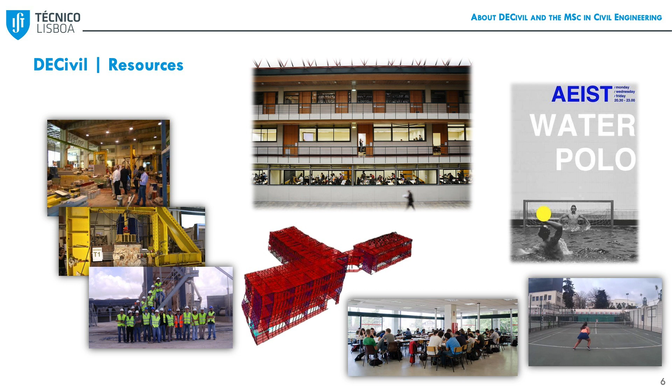I'm sure that most of you are aware of the resources that IST offers and also our department to our students, not only for teaching activities, but for other areas that are important in their lives: sports, students' associations. I think this completes their experience at IST.

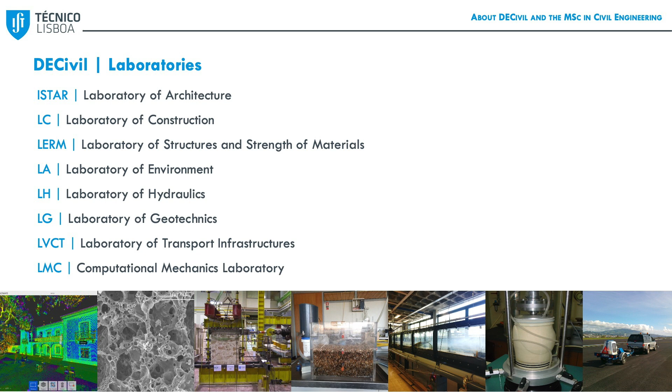For research infrastructure, I think we are quite well equipped in terms of laboratories. Here I listed, and you see some images of laboratories in different areas of civil engineering. This is very important for teaching activities, experimental classes, but also for research. So I would say that most students, or many students at least, develop their master dissertations in these labs.

I will let you read the names of the courses, while I highlight that the first semester is common to all areas of expertise. So you see the courses from the different areas of civil engineering that I will mention next.

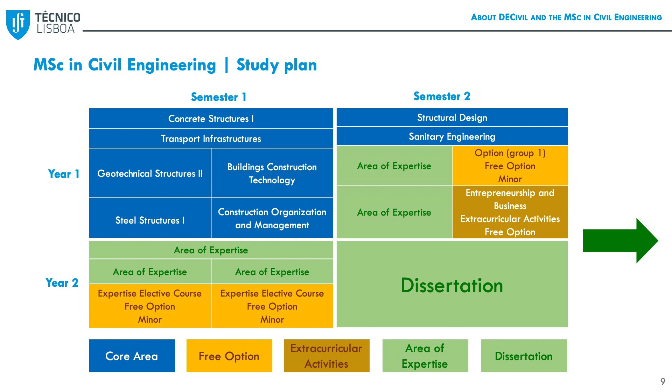Second and third semester, students already have to select their area of expertise, shown in these green boxes. They also still have some common courses from the core that we think is important for the background of any civil engineer. In orange, you can see some free options that students can select, either from civil engineering or from other departments, including a minor. And then finally, the dissertation that covers the last semester.

I think this is also reflected in the elective courses that students have, namely in these free options. This is different from the masters in civil engineering offered in other universities in the country, which are more narrow than what we offer.

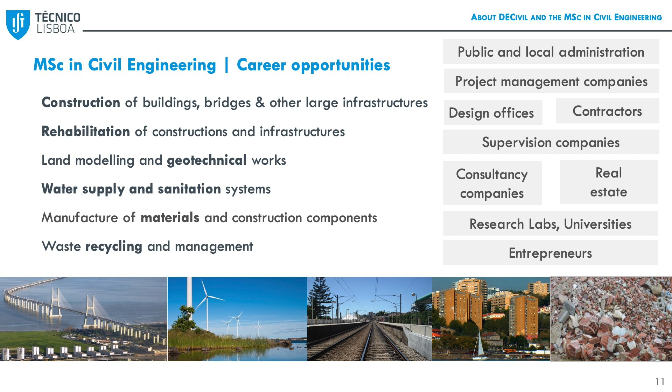Well, in terms of career opportunities, I listed on your left-hand side the areas of intervention typical of a civil engineer, and on your right-hand side, the stakeholders or agents where these activities can be developed. So you can see that civil engineers can operate in very different areas: construction, rehabilitation, geotechnical works, water supply and sanitation systems, materials and components, recycling and management of waste, urban planning, transports, logistics, management and maintenance of projects, works and assets, and also research.

And they can do it in these different roles: public and local administration, project management companies, design offices, contractors, supervision companies, consultancy, real estate, labs, and also building their own company. We have several examples of success of students from our master who started quite successful businesses in civil engineering and related areas.

Well, in terms of career opportunities, you are aware of the recent past. My personal view is that the future prospects should be optimistic. We know that there is a big shortage of civil engineers worldwide, not only in Portugal, but also in Europe, in the US. Wages are starting to increase, fortunately. And there are many big projects, public, private, long-term investments scheduled for the next two decades. So I think there are lots of things to do for civil engineers.

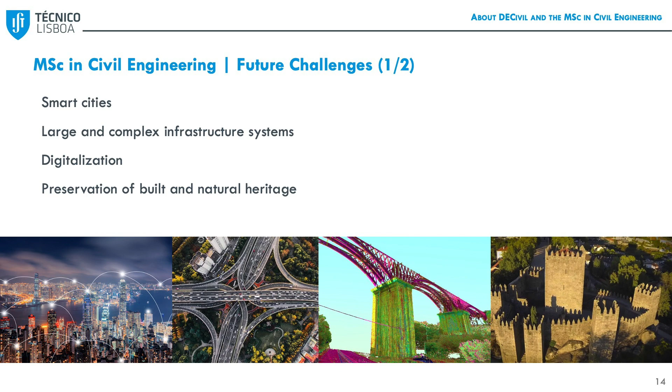Another aspect worth highlighting is that we civil engineers are essential to address many of the future challenges of mankind. If you think about some of these challenges, civil engineers are needed there. We are needed for smart cities. We are needed to develop these complex and large-scale infrastructure systems. The industry is in a transition towards digitalization, robotization.

At the same time, we need to preserve both our built and natural heritage. Civil engineers will also be extremely important to respond to societal changes, but also to address a number of problems, natural risks, and climate change that is there. This will impact not only our daily life, but we need to prepare our infrastructure and buildings for all these changes. So here I illustrated some of the problems that we will have to help solving.

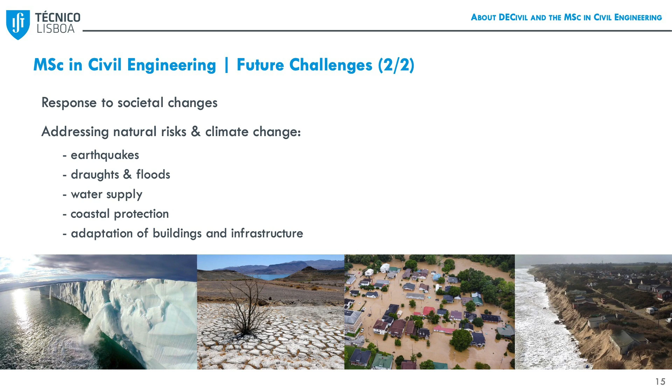Droughts, floods, water supply, coastal protection. We have a big coast. We know that this will happen. And civil engineers will be needed to address these problems.

Okay, so let me move now to the second part. In 20 minutes, and I will try to fill the time that was allocated, it's not easy to explain research on composites, because most of you perhaps are not aware of what composites are. So I will try first to explain what these materials are, how they were introduced in different industries during the years, how they can be applied in civil engineering, what are the main challenges for such application, and how we at Técnico have been addressing the unknowns and those challenges in innovative products.

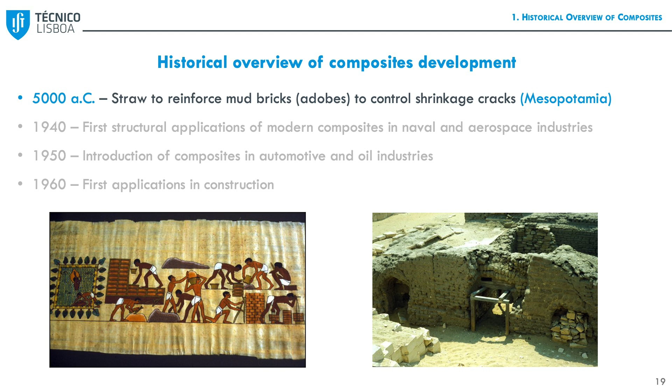The first known composite material in history are these adobes, used or developed in Mesopotamia almost 7,000 years ago. The idea was brilliant. These adobes were used for construction of houses, sanitary, different applications, and they were basically mud that was put to dry under the sun. During the drying process, these bricks cracked due to shrinkage. The main idea was to introduce fiber reinforcement that resists tensile stresses and prevents these cracks. This is basically the same that we are doing now with modern composites.

We use fiber reinforcement, not natural but synthetic, to reinforce another material that is not mud but a resin.

Okay, so modern composites, well, it took a while. We had first to wait for the plastics industry to develop in the 1930s and 40s. Then we could use these modern composites in first naval and aerospace industries, which are still large consumers of these materials, for instance due to their lightness, which is very useful for these specific industries.

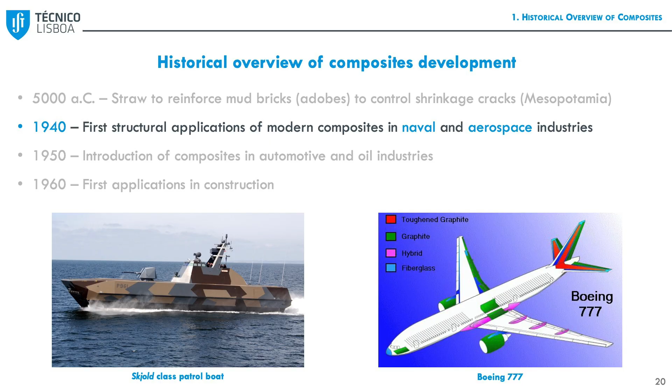In the 50s, they were introduced in automotive and oil industries, where they are still used very often. And in construction, quite interestingly, there was a first attempt in the 60s to use composite materials.

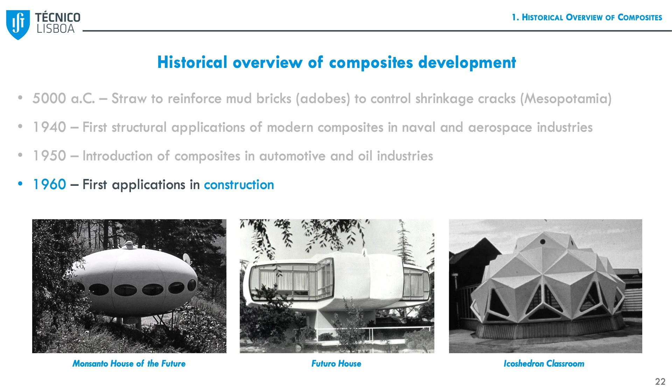Here I brought three of some of these first stage applications. You can see the rather futuristic architecture. Architects were in fact extremely curious and motivated by the potential of these materials, by the shapes they could cope with. But this initial effort ended up being abandoned for two reasons.

First, the cost. The material was very expensive by then. And second, people or engineers were not aware of how to design these materials. There was not enough technical knowledge.

Well, in the 70s, there was an extension of these products to new markets. So racket tennis, okay, the graphite tennis rackets are from this period, skis, and also surfboards.

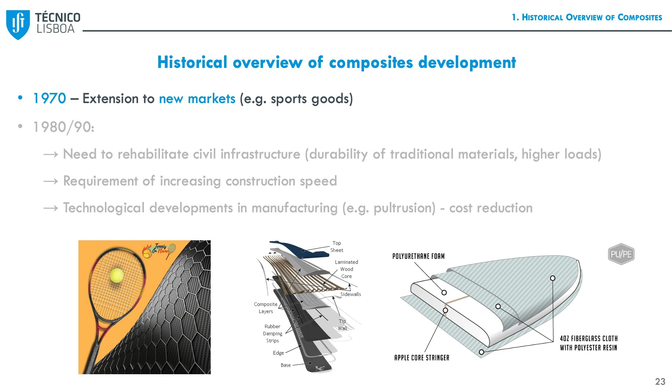If you look at this surfboard, it's basically a sandwich panel like this one. Two face sheets of composite, and in the middle a polymeric foam. It's the same.

So we get to the 80s and 90s when these materials again saw a resurgence of interest by civil engineering. And here I list the three main reasons.

The first one: there was a huge need to rehabilitate civil infrastructure. Most structures, or a large stock of buildings and bridges, had been built after World War II, and corrosion problems, namely, started to appear with big relevance in this period. So it was clear that new materials, more durable and less prone to corrosion, were needed.

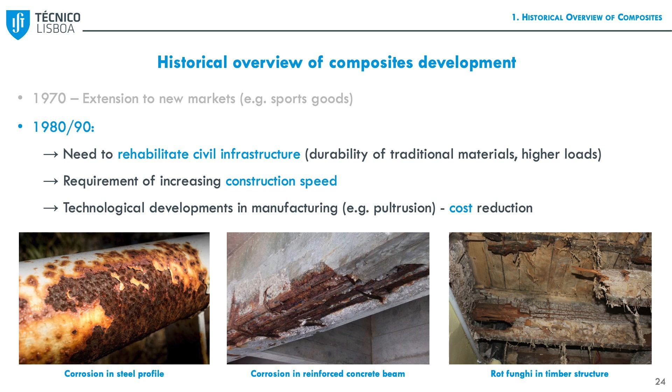Second reason: the interest for having faster construction. This occurred together with a reduction in manufacturing costs due to technological developments in processing. So these three features that composites offer - high strength, lightness, and durability - together with more affordable costs, explain this new interest from the construction industry that has lasted since the 80s and 90s.

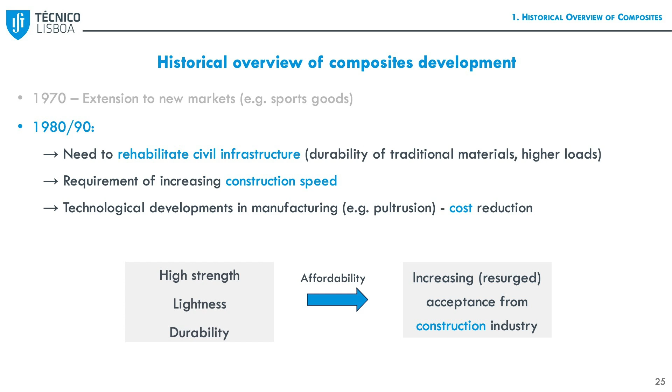So let me now show what are the key products that are available for civil engineering. I organized them here in 4 groups, and I will show you examples.

So the first application is the internal reinforcement of concrete structures. So bars - instead of using steel bars, we can use FRP bars. FRP stands for fiber reinforced polymer.

Second example is the external strengthening of existing structures. This is now a well-established technique - most design offices and many contractors use it regularly. Strips, such as this one, made of carbon fiber with epoxy, or sheets like this one that is dry and then needs to be bonded to the substrate, are being used not only with concrete structures but also with other structural materials.

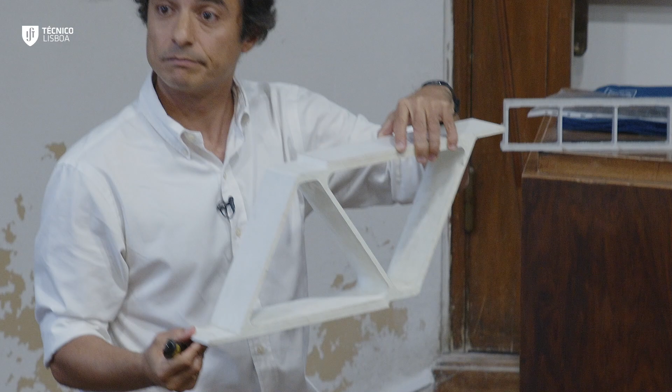And here, two different solutions where we rely more on composites: what we call hybrid structures, where components made of composite - for instance, this structure here has one of these decks made of composite - but it is connected to steel girders. So they work together, which is why we name these structures hybrid.

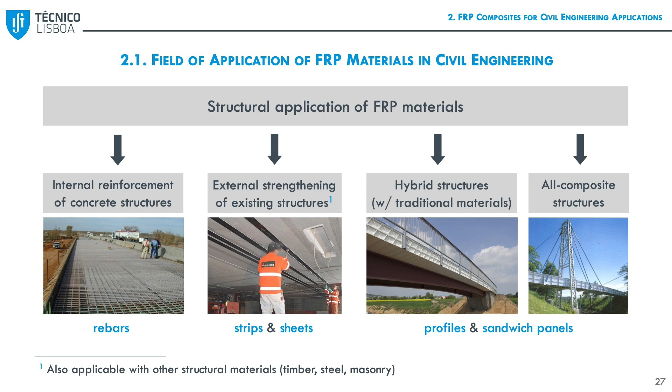And then we have all-composite structures, where all components are composite. For these two cases, we have panels like these ones, and profiles.

So let me now introduce some features for each of these products. I will not give technical details, just a glimpse of what's available.

So for rebars - and I'll try not to be too technical - they are basically made of glass fiber rovings, meaning axial fibers only, with a matrix of vinyl ester. You have different resins; vinyl ester is an improved resin compared to polyester, which is the standard grade, because concrete is a relatively aggressive environment, so we need a slightly improved resin.

Well, they are supplied in diameters similar to steel bars. The surface finishing initially was a problem - the adherence to concrete was not good - but now, as you can see, either with ribs or with sand coating, the adherence to concrete is enough. And these are the geometries available: straight bars, and also bars with bends to produce stirrups or ties.

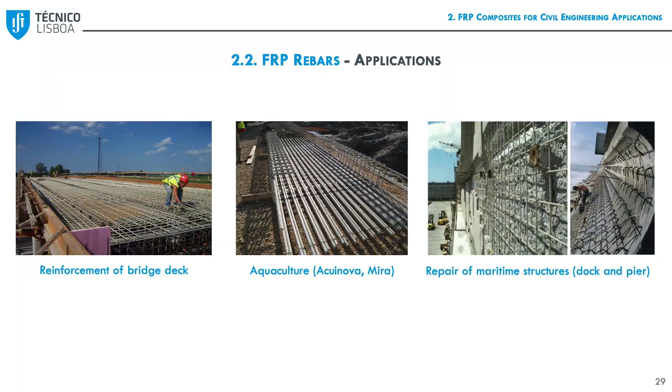Here are some examples of applications: bridge decks. This is useful in cold regions where de-icing salts, which are highly corrosive, can be used in the winter. And here, maritime structures - this one in Portugal, actually - where due to the salt water, it's a big advantage to use these rebars.

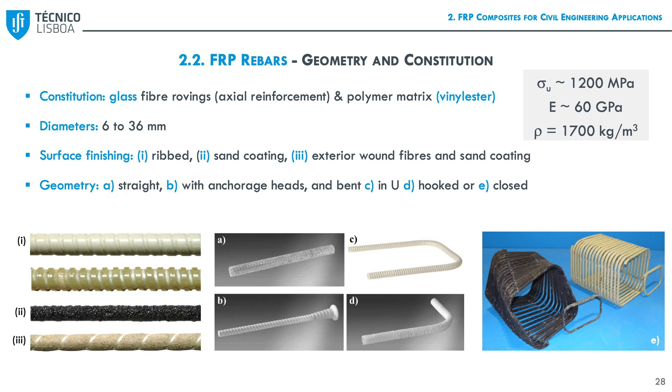Now, the properties that I did not mention. Tensile strength, 1,200 MPa. This depends on the amount and type of fibers, but this is a typical value—about 3 times what we have for steel, with a self-weight that is 4 to 5 times less. There is always a disadvantage, otherwise we would always use this type of bar instead of steel, and one is the elastic modulus. They are more deformable if they are made of glass fibers.

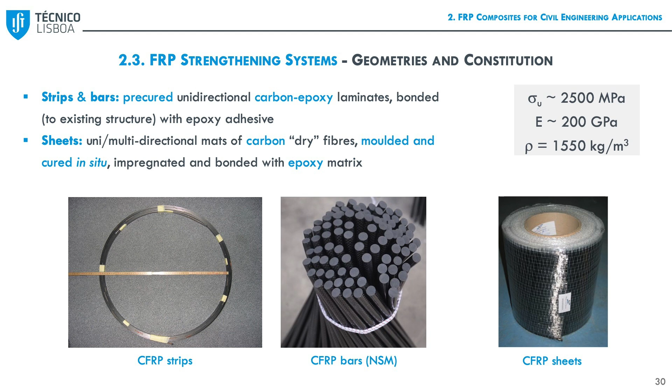The second product are strengthening strips and sheets. Strips like this one are made of carbon fibers. They resist more than glass, and they are extremely lightweight, as you see. The tensile strength in this case is around 2,500 MPa, so 5 times more than steel, with an elastic modulus similar to steel.

So this is why it's now a standard solution for strengthening. These strips, and also bars, are very easily applied by bonding adhesive and sticking the element to the substrate we want to increase the capacity of. The other product are these sheets—dry sheets with fibers that can be applied in different directions depending on your needs. They are simply molded and cured on site with epoxy matrix. The advantage is that if I want to reinforce or strengthen this member, I can apply it like this, molding it to complex shapes.

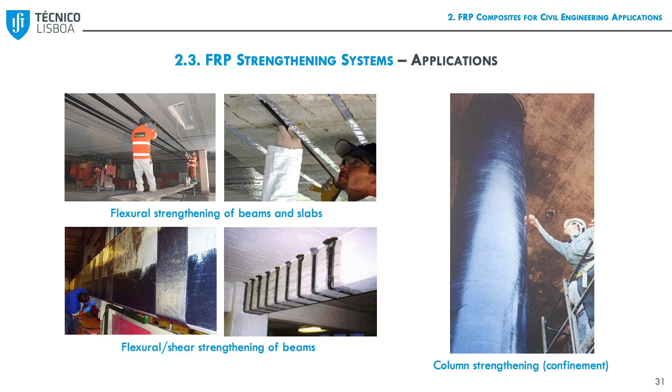Here you can see some applications in flexural strengthening of beams and slabs, and here another application of sheets for the confinement of columns. This is very important to improve seismic resistance, to confine vertical members, and it's very effective.

The third product that I mentioned are profiles. Here what we call the first generation profiles, thin-walled sections. They look pretty similar to steel profiles, but they are much lighter, 4 times lighter, with similar strength but lower stiffness. So this changes the way they are designed.

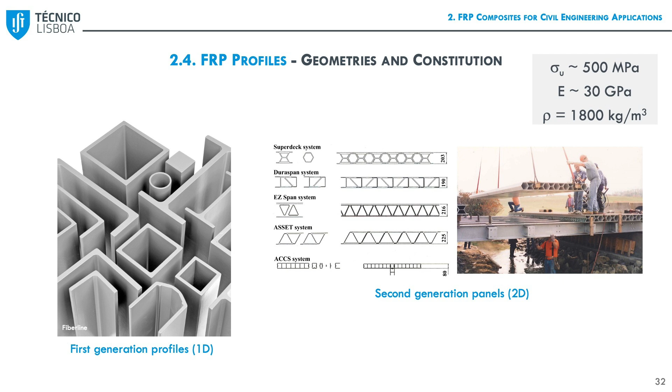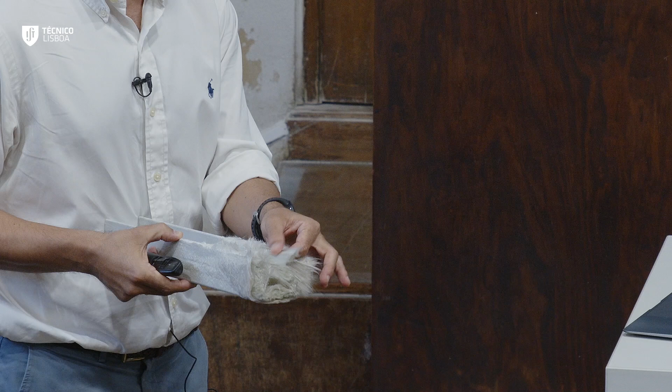On your right-hand side, you can see what we call second generation panels or profiles with 2D sections, used for decks, for instance, of bridges. This image, and also this profile I brought, shows the internal constitution of these profiles—you can see rovings, longitudinal fibers, combined with mats with fibers in different directions. The principle in composites is that we can combine these ingredients, using fibers in the directions we need, to obtain the strength and stiffness that copes with the design requirements.

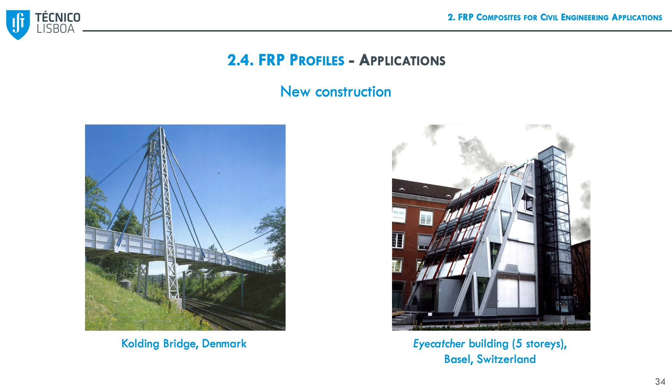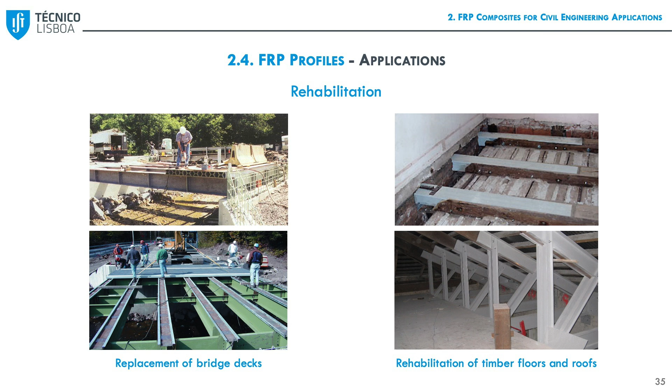Here you can see some applications of these profiles in new construction and also in rehabilitation: replacement of degraded bridge decks, where we can keep the girders, or rehabilitation of timber floors and roofs.

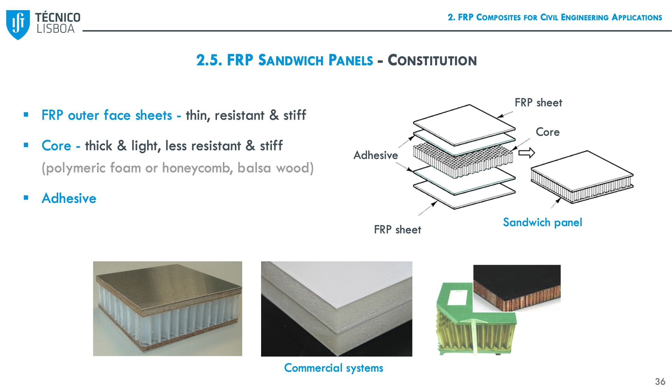The final of these products are sandwich panels. I already explained more or less the concept. In the simplest form, you have 2 face sheets of composite, which behave like the flanges of an I section, and in the middle a very lightweight material that provides the lever arm for the face sheets. So it's the type of solution that, compared to profiles, gives us the highest properties at the lowest weight. Here we can use balsa wood, extremely lightweight, and different polymeric foams.

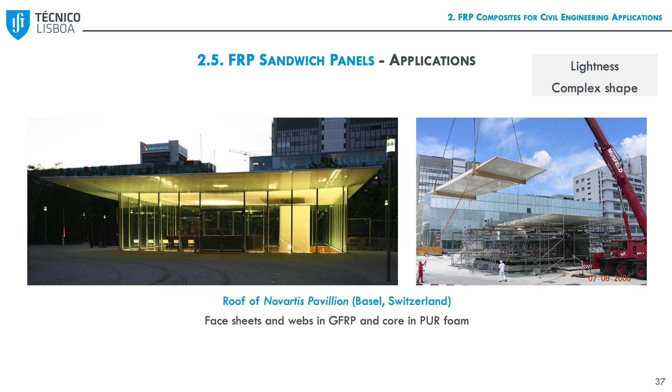So let me show you some examples of structures that have been built. This very nice roof was installed over this glass facade—it had to be very light and with a double curvature, so a complex shape.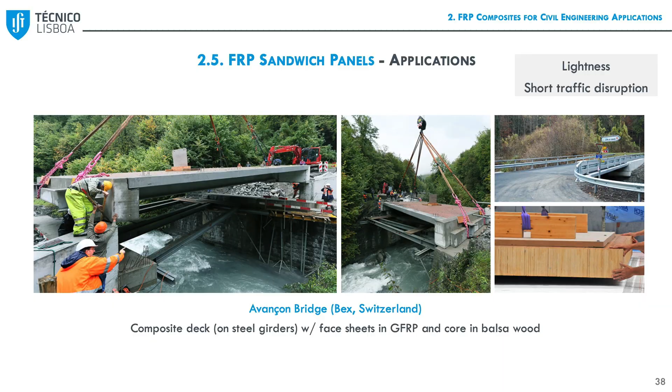This road bridge used exactly this type of solution, balsa wood, which had to be built very quickly to minimize traffic disruption. A very light solution was selected for this reason, and also because the abutments could not resist the loads of a conventional solution.

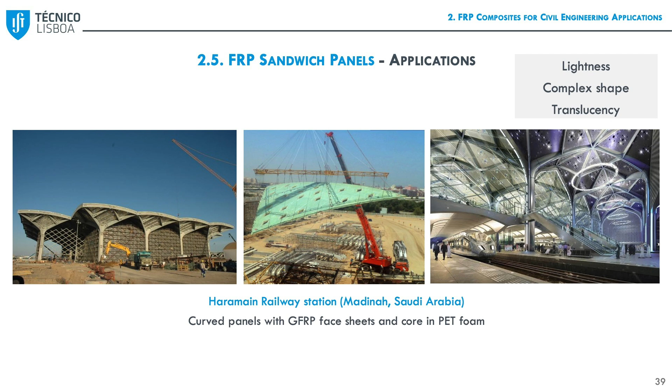Now that you know what composites are, let me very briefly detail the main challenges, in my view, that these materials face. These are quite complex issues—I would need more time, but I would like you to know what's at stake.

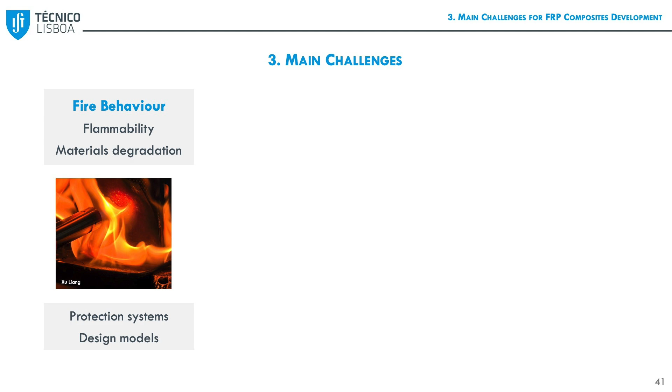I showed composites and I showed buildings, and in buildings we need fire safety. Fire behavior is a major concern here. These materials are flammable, so they burn, they release heat and smoke, and the material properties decrease at elevated temperature. This is one of the key points for any of these products if they are used in buildings—this needs to be addressed.

So we need protection systems, the same way we need for steel structures, but we need to know how to design them. While for steel there are already rules that have been validated and checked, this is where we still have a long way to go.

A second challenge is durability. This seems a bit paradoxical - I was saying that durability is a key advantage, and now it's a challenge. It is, in fact, a challenge, because these materials have proven good performance in quite harsh environments. But in all those industries that I mentioned, we don't need to design for 50 years or even 100 years.

This is a big difference to civil engineering. After looking at the codes used to design structures in those industries, I think our codes are better - reliability of our structures is guaranteed in a more comprehensive way. We know that some degradation occurs, but we still don't know how much it will be after 50 or 100 years.

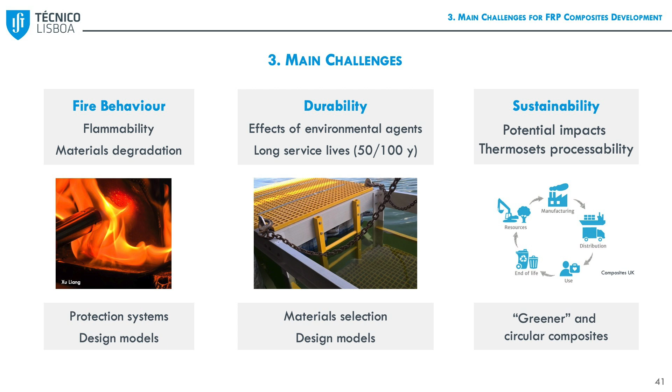So we still don't have reliable design models for durability design. Third big challenge is sustainability. Now, for all solutions that we adopt in engineering problems, we need to know what will be the impact compared to alternatives. And composites, for different reasons, cause environmental impacts.

One important reason has to do with the type of resins we use, which are thermosets. It's difficult, not to say impossible, to reprocess this type of resin in practice. So alternatives are being pursued that need to be assessed throughout the life cycle. The industry trend right now is really towards greener and circular composites - this means bio-based composites, composites with thermoplastic resins, so different routes are being pursued here.

Okay, so in these very last minutes, let me show some of the work that we have been doing in these areas. First of all, what has been the research team.

This group was started in 2008, so it's 15 years old already. Until now we were 3 professors - now João Firmo moved to concrete, but still working in composites. We have 4 postdoc researchers who have been working in this area for quite some years, 8 PhD students, some already ending, some starting, and every year we host around 6 master students.

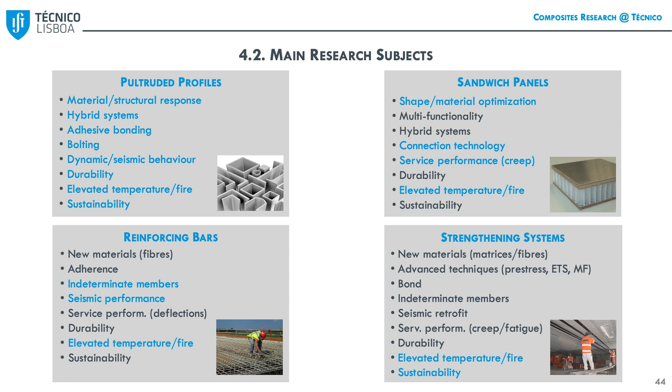Here I listed the research topics organized by those 4 products. I don't expect you to read them, but these are the topics that have been relevant at an international level. I marked in blue the topics in which we worked, or at least gave some contributions. One interesting thing is that those challenges I mentioned - durability, fire behavior, sustainability - are present in all those products, it's everywhere.

So I will just, because the time is short, show some highlights of what we did, especially here in profiles, but not only. Of course, this was the starting point.

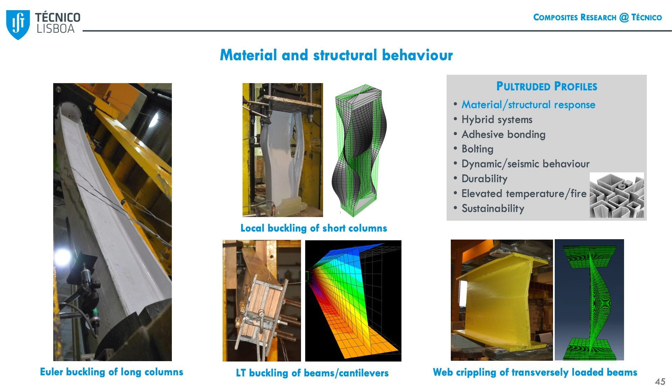We had to understand the mechanics of these materials - the material behavior, the structural behavior of different members, columns, beams. Some phenomena are similar to what we have in other structural materials: local buckling, Euler buckling, lateral torsional buckling, web crippling. But of course, materials are different, so the phenomena are triggered in a different way.

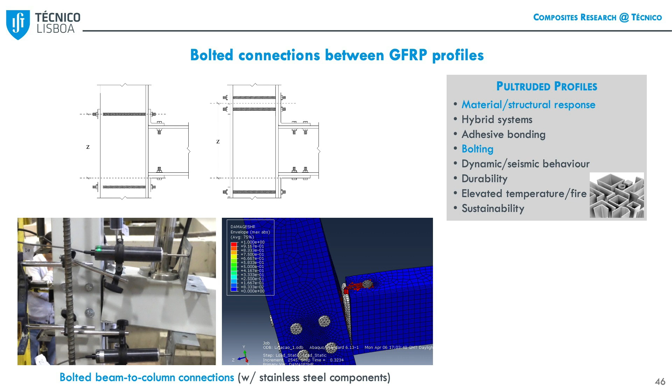We also worked on connections, bonded and bolted. This is also a bottleneck of these materials because they are orthotropic, so they don't behave the same in all directions. The route we pursued was basically to adopt hybrid connections - including stainless steel components that are able to dissipate energy, to have nonlinear deformations, combined with composite materials. This proved to be quite interesting, and we upscaled this to the structural level.

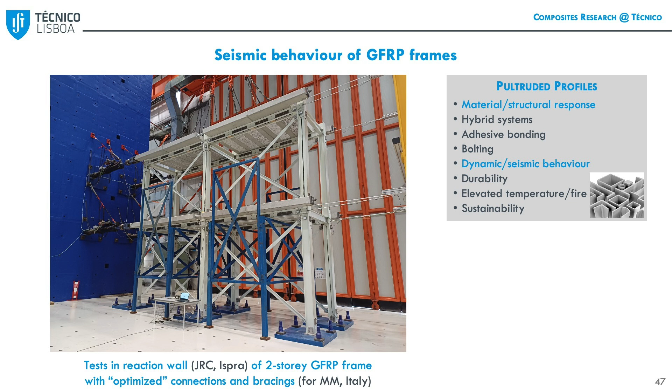These are very recent tests we did in ISPRA, at the Joint Research Center, for an Italian company, where we designed optimized connections for them with this concept. This frame was tested in a reaction wall, under horizontal loads, to assess its ability to resist wind loads, but also seismic loads.

In another project we assessed the same problem with this type of connections, and we did tests on our shaking table. The idea was to see if it resisted our 1755 earthquake - actually double that in terms of accelerations.

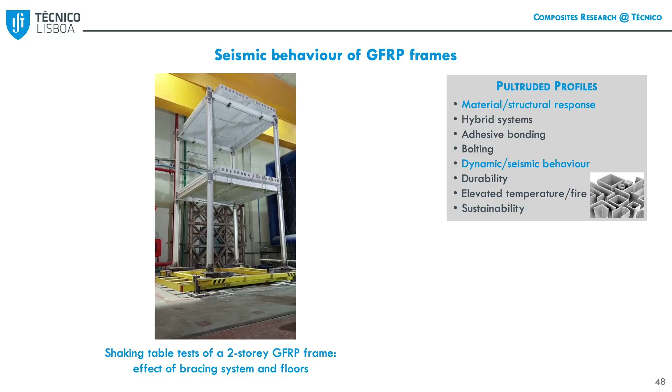So we were about 15 meters away, okay? And it resisted.

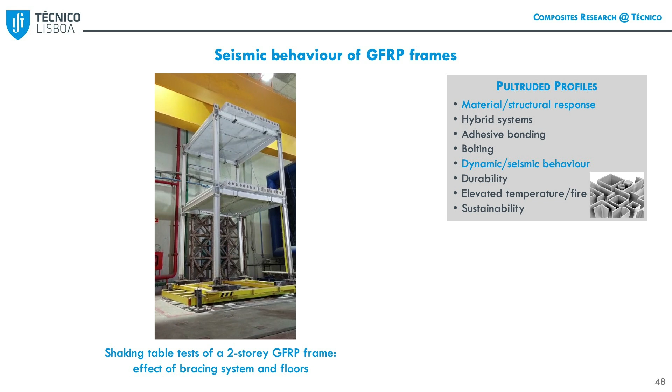Okay, moving down in terms of scale, durability. This for me is one of the key points we need to improve in terms of knowledge. So what we have been doing in recent years is to check or understand what happens due to different environmental agents. We are doing this for natural weathering. This is a project we are developing with different stations located in different areas in Portugal, where the aggressiveness of different environments is different. But we cannot wait 20 or 50 years.

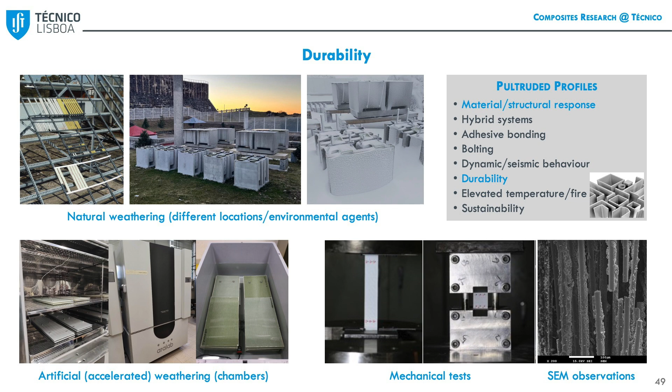So we are also doing artificial weathering in chambers, and here the idea is to cross-correlate the degradation in terms of performance between the two types of weathering. At the same time, we are looking into the oldest structures built in Portugal, that are 20 years old, and collecting material to understand degradation under real-scale aging.

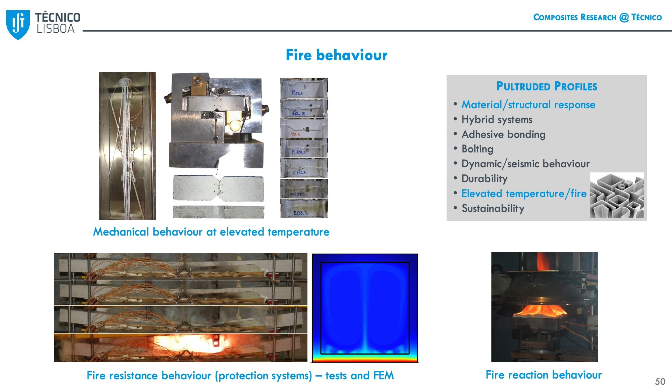For fire, we also did quite a lot of research to understand mechanical behavior at elevated temperature, and also at the member level, what happens when members are exposed to loads and fire at the same time. So both experiments, and here with colleagues from computational mechanics, the simulation, which is quite complex, of this problem.

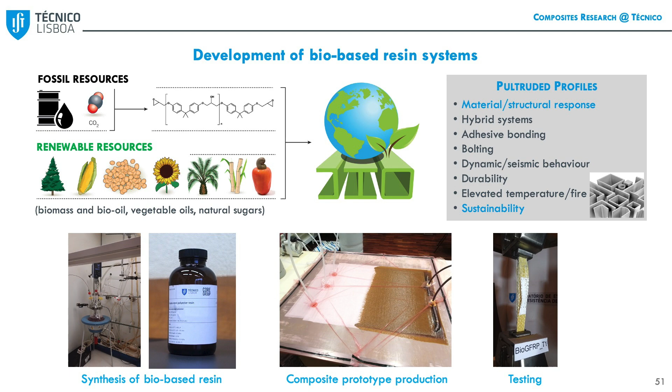And for sustainability, this was a project led by Mário Garrido, the bio-based resin systems. And here what's interesting to tell is that we did not have the expertise, so we asked collaboration of colleagues from the chemical engineering department. So big challenges involve teams with people from different areas.

So they helped us, and we had a brilliant student. He was a civil engineer, a structural civil engineer, and he had the courage to go to a chemical lab to synthesize bio-based resins. He was able to do it, and the idea here is to use renewable resources instead of oil to produce our resins. It was quite successful, as I will show in one of the last slides.

Well, to finalize, I'm about to finish. We have always tried to translate this knowledge to applied research projects, to respond to challenges and requests by companies.

One of these projects was the Clickhouse project. This was developed with Minho and also with ALTO, a company in Maia. The idea here was to develop an emergency house, all composite, that could be built in one day by 3 workers without any relevant equipment.

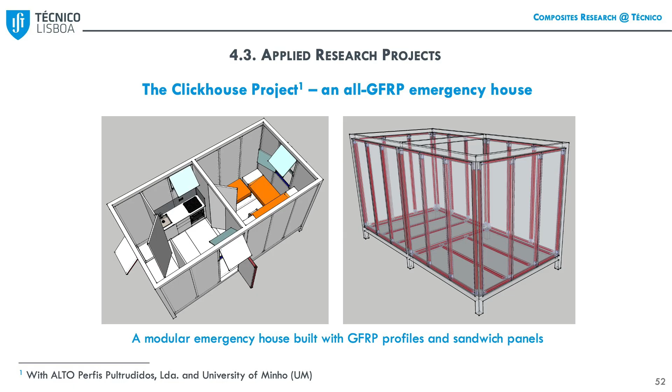So we had collaboration of colleagues from architecture for the design of the layout, and then all the facilities like water supply, acoustics, thermal comfort, all these aspects were addressed experimentally and then based on simulation. This is the final prototype that was developed.

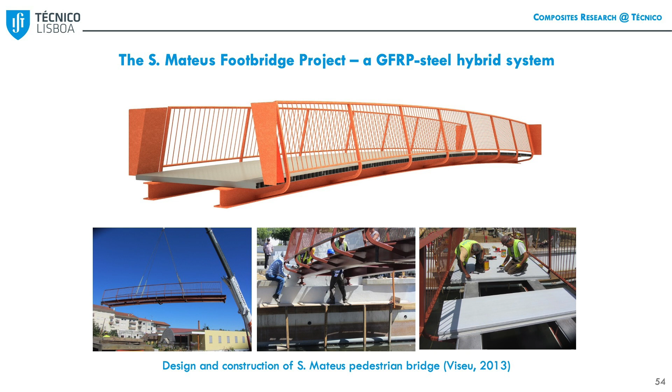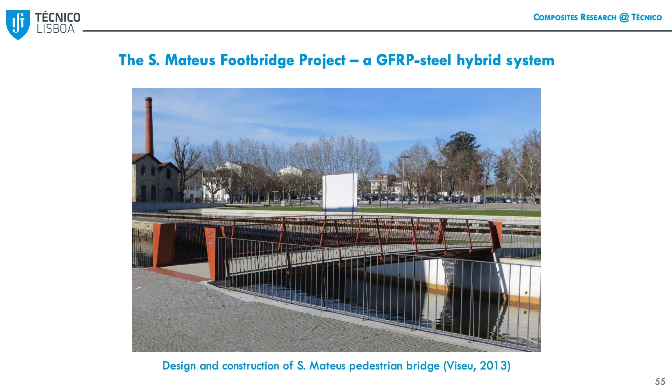Another project was this hybrid footbridge that was built in Viseu, where our student came from. It combines steel girders that you can see here. They were produced in a shop, lifted with lightweight equipment, positioned over the abutments, and then you can see these panels that were brought by 2 men very easily and simply bonded on site. So this was built in a few hours. This is the bridge after being completed, and here you can see how it is integrated in the landscape.

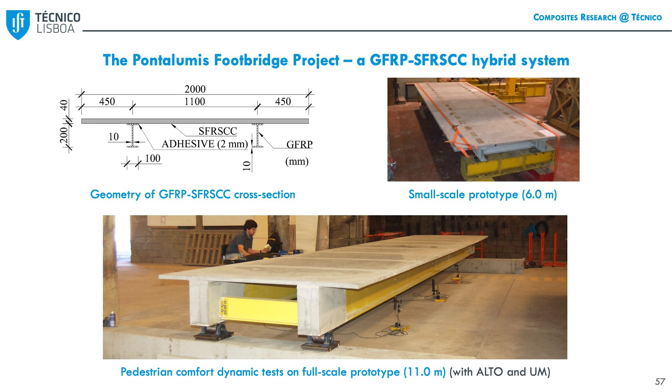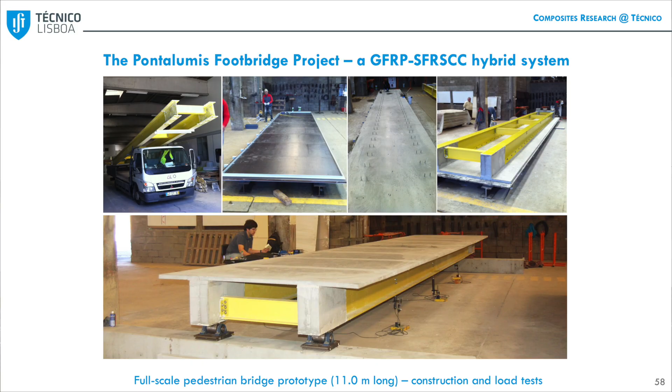Another project, another hybrid bridge, here a different concept. Composites here are used as girders, and they were bonded to a very thin deck with only 4 centimeters thickness of steel fiber reinforced concrete, so no rebars whatsoever. So we did tests in a small scale prototype, and then you can see here the full scale prototype being tested for comfort of pedestrians. Here is the construction. The final load tests with twice the characteristic load that is necessary for pedestrian bridges.

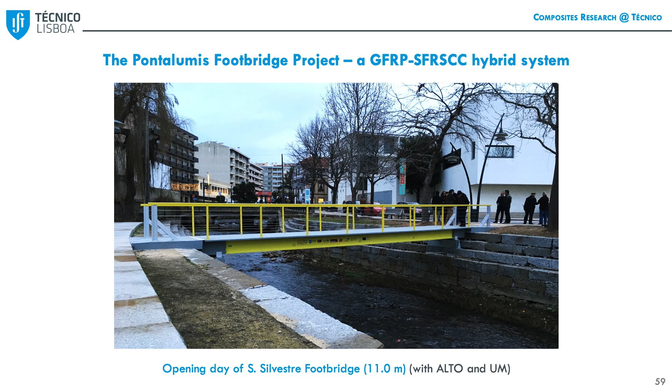And here, the bridge, it's there. It will be 10 years old this year. Okay, it's in Ovar.

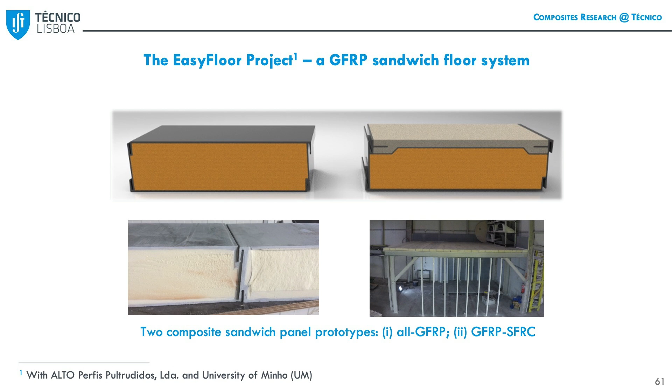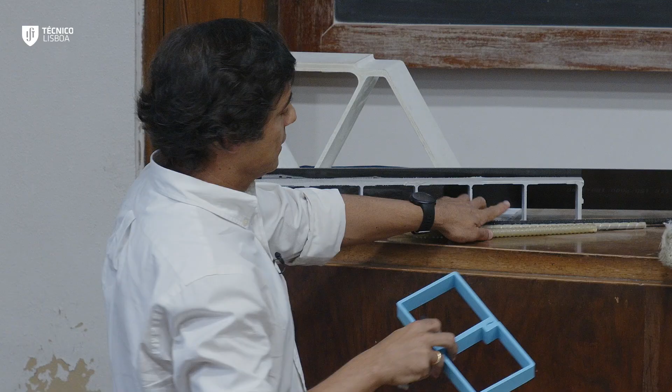Another interesting project, we called it the EasyFloor. The concept was to develop sandwich panels for rehabilitation of building floors and use composite to cope with different requirements, not only structural, but also acoustics and building physics with additional layers if necessary. The main feature of these panels, developed with a brilliant student who worked on this project, was these snap fit connections, printed with a 3D printer machine. The idea is that these panels are installed like this, and they can be easily dismounted if necessary.

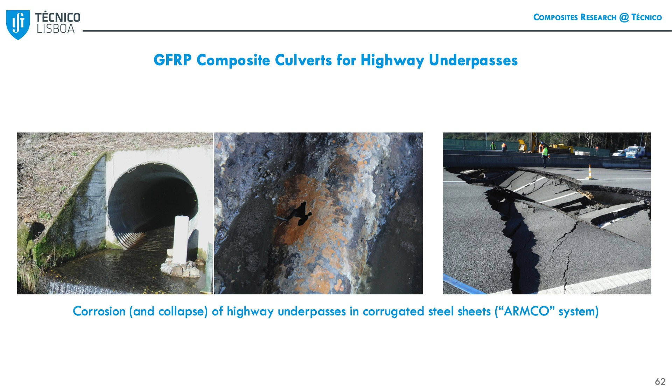A more practical project to address a real problem. Many of these highway underpasses, agricultural and hydraulic underpasses, in the 80s and 90s were built with this Armco system, a corrugated steel sheet, which has, as expected, huge corrosion problems right now. This was taken from, I think, the A17 highway. There was a collapse several years ago, and it was disrupted for about 1 month. It's one of the main highway axes in the north of Portugal.

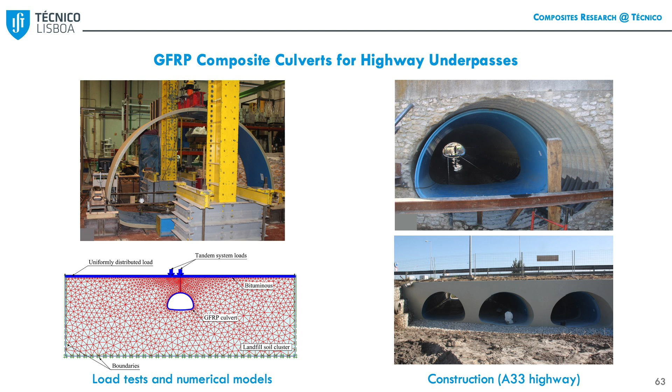So it was not our idea, but we helped this company in this project to apply FRP culverts, composite culverts, as you see here, installed inside the structure that has these problems, and then the space in between, which is almost fit, is then injected with grout. Here you can see the tests that were carried out in our lab, the numerical models that were developed, and here the completed structure.

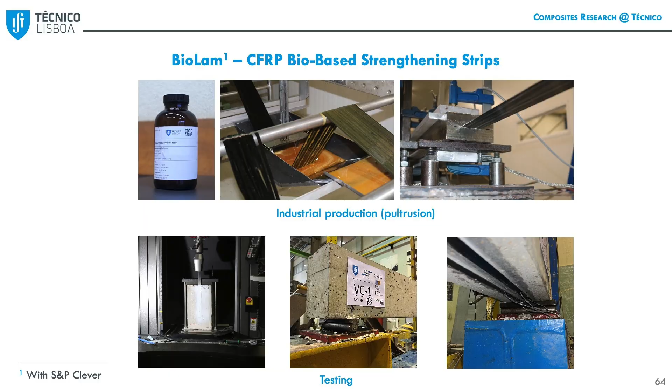And the last project, as I mentioned, this bottle of bio-based resin was then applied at an industrial scale with this company, S&P Clever, in Elvas, to produce strengthening strips like these ones, using our bio-based resin instead of epoxy. It was proved by tests that it behaved in the short term like the conventional strips.